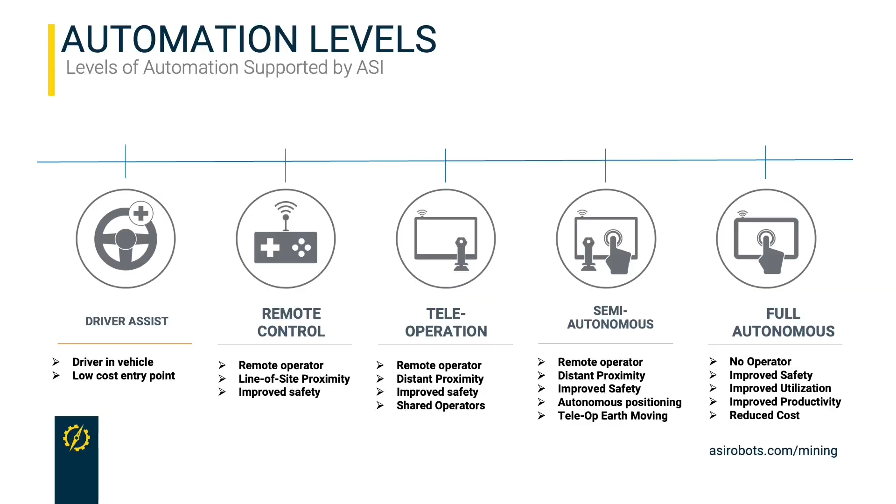Some of the unique differentiators that make ASI as a technology provider different from other applications is really the degree of being OEM agnostic, being able to work with a variety of makes and models of equipment, something very helpful in an application like blasting.

Highly retrofittable, so not only with new machines, but things that can be retrofit to existing machines, even older machines that date back prior to any kind of drive-by-wire capability that have to be retrofit.

Interoperable with legacy systems, like fleet management, is one of those applications where we've integrated with fleet management systems, as opposed to having to require a full change-out of the full technology stack. We try to integrate with legacy systems such as fleet management, and then be interoperable with participating OEMs.

We welcome and encourage participation by OEM partners and allow open access to our protocols to be able to integrate with a third-party OEM to automate that vehicle as a plug-in to our automation solution.

And an agnostic integration platform. So really this platform is all about broad autonomy and the kinds of applications that can plug into it.

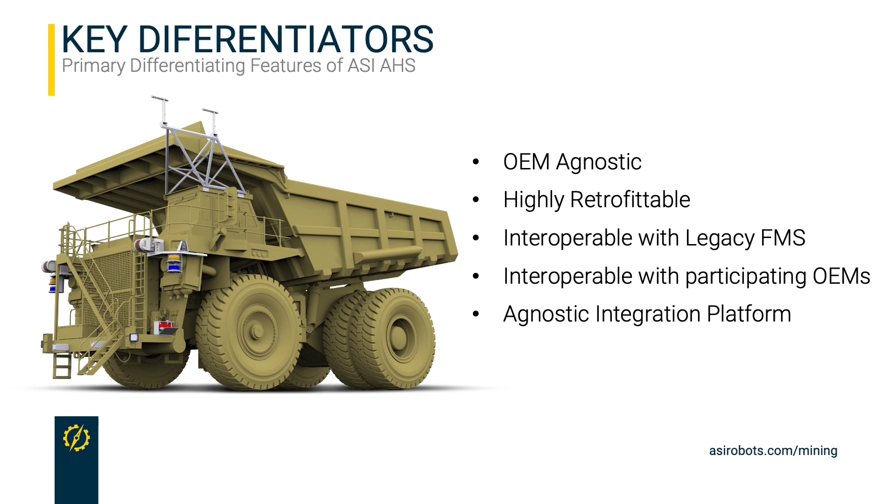As far as the pedigree of ASI Mining is concerned, we started quite a while ago, back in 2006, in the automation space for mining, automating Cat 777s in the Arizona desert, working with articulated dump trucks, dozers, wheel loaders, etc.

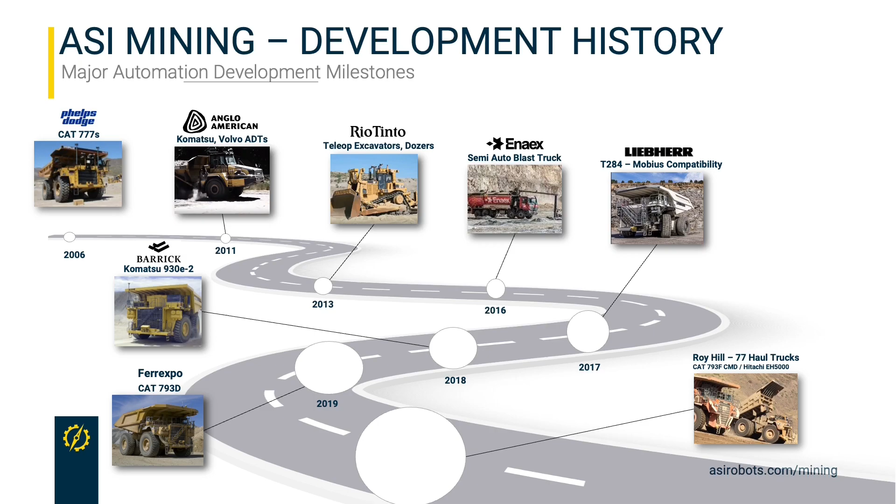In 2016, we started working with Enaex on their semi-autonomous blasting capability, really around ANFO and stemming operations, and being able to position those trucks in a way that Enaex could then leverage them as part of their autonomous blasting solution. We've continued to work with other companies and mining operations.

In 2018, we started working with Barrick on a fleet of Komatsu 930 trucks in the Nevada desert. Currently working with Ferrexpo in the Ukraine on fleet automation of Cat 793Ds, and then Roy Hill in Western Australia, which is a large installation of trucks.

Just to showcase a little bit of some of these beneficial uses of autonomy: really, driving around safety is the first and largest contributor for autonomy.

By removing operators from harm's way, we definitely can increase the safety of mining operations. The nice thing in autonomy has been that there have been no human injuries or fatalities experienced from autonomous operations in the mining industry so far. So we're very pleased about that.

The biggest financial benefit really comes from utilization and availability of a truck, whatever asset is being automated. Typically we see anywhere from 15 to 20% increase in that utilization and availability through autonomy, by eliminating things like shift changes, breaks, and other human-caused delays that are not leading to productive use of the assets. So that's definitely the biggest driver of autonomy.

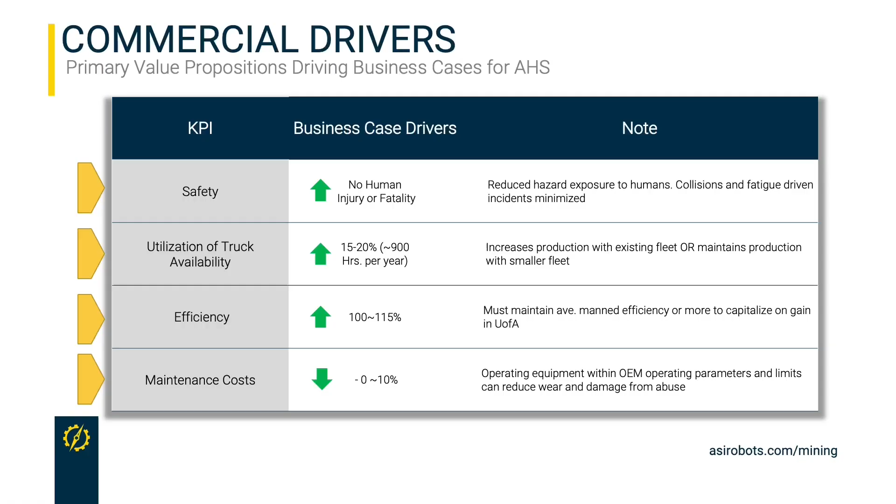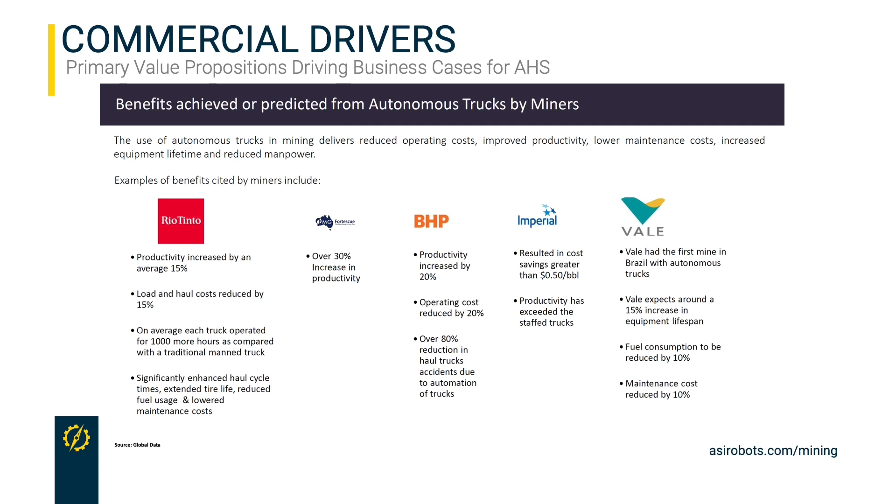You can kind of see in the autonomy world there's been a lot of public statements made by big tier 1 companies that have been users of autonomy for a while. Folks like Rio Tinto have been operating autonomy for several years, stating productivity increases by an average of 15%, load haul cost reduction by 15%. FMG similar, up to 30% increase in productivity. BHP, Imperial, Vale, all making statements in similar fashion of gains in efficiency and productivity ranging up to 20 to 30%, reducing the number of trucks and reducing their fuel and maintenance costs. So it's definitely being more and more widely understood as we continue to see more benefit statements coming out of early adopters.

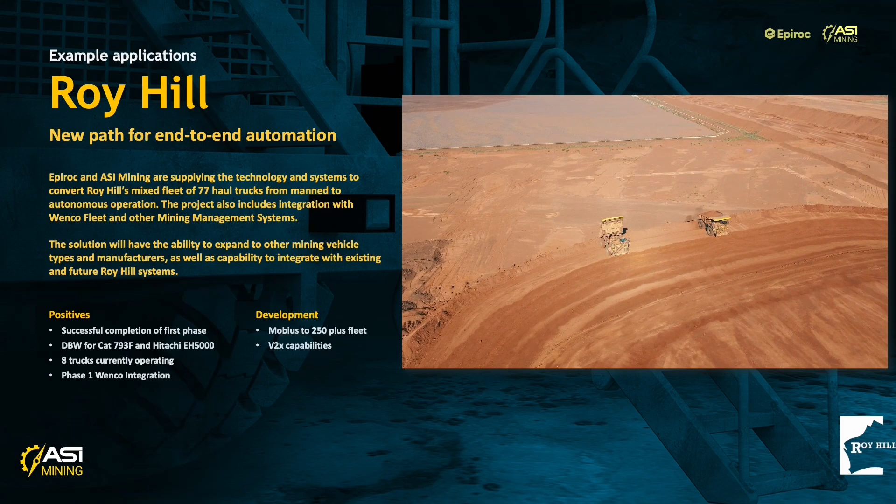So a couple of examples of our OEM agnostic field autonomous solutions that have been fielded. This one, as mentioned earlier, is at Roy Hill. A couple of notable things about this project: it's very large, consisting of 77 total haul trucks of 2 makes and models, Cat 793Fs and Hitachi EH5000 trucks, that all operate under a Wenco fleet management system. These trucks are part of a network of up to 250 total assets that will have either situational awareness in addition to the autonomy that's factored in. We use what's called V2X technology to help supplement communications between vehicles, in addition to vehicles to a central server. It's a very ambitious project, and we're well into phase 2 out of a 3-phase project in Western Australia that's ongoing.

Another example I'd like to talk about is at Ferrexpo. This is in Ukraine. It's an iron ore mine that is leveraging autonomous technology to convert a fleet of Cat 793Ds. Currently operating 6 autonomous trucks, and will expand up to 15 trucks in the 2nd phase of this project. One interesting thing about this project - it's one of the first, and maybe only, instance where we're actually loading autonomous haul trucks from a drag line. This also features an integration with the Wenco fleet management system, and again is an exciting first entry of autonomy in the CIS in Ukraine.

So interoperability - something we talk a lot about - we want to spend a little time talking about what that really means. A great way to illustrate that is through this architectural drawing of our particular autonomy stack. Starting at the top with the fleet management system, and again, as mentioned before, it can really be any third-party fleet management system provider. We hope to be able to integrate with a legacy fleet management system, such that the mine operator can keep the investment they've made in fleet management in place as they contemplate adding autonomy.

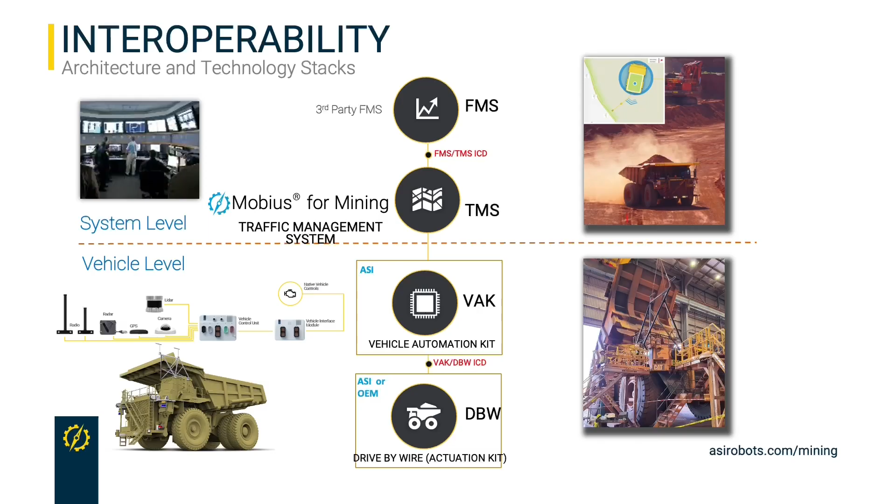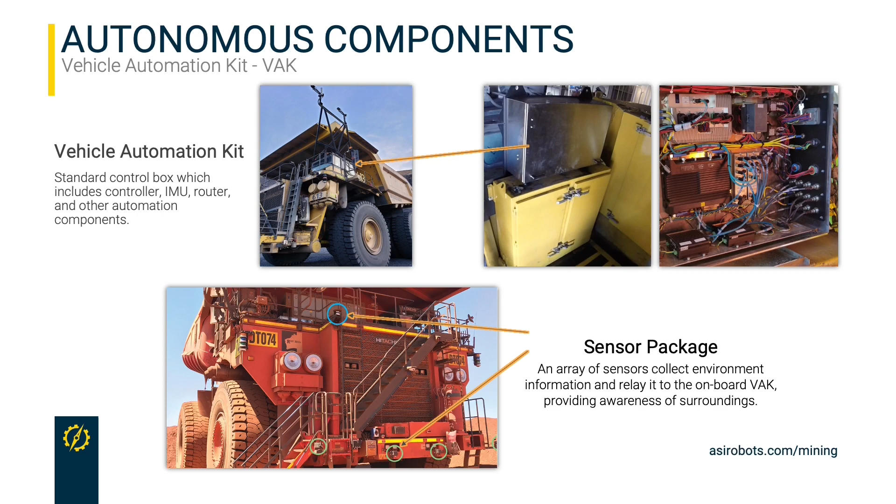This is a brief slide showing the position of the sensors and the vehicle automation kit, typically placed on a haul truck, where you see forward-facing LiDAR and radar units that are part of our vehicle automation kit, with the box integrated into the truck in convenient locations. Again, this is a standard component that goes on any vehicle we automate, and it interfaces with a drive-by-wire.

Liebherr is one example where we've actually been able to integrate with a third-party OEM to bring their system into our Mobius solution. We announced this several years ago, and Liebherr continues to be an example of an OEM that can interface with an agnostic system like ASI.

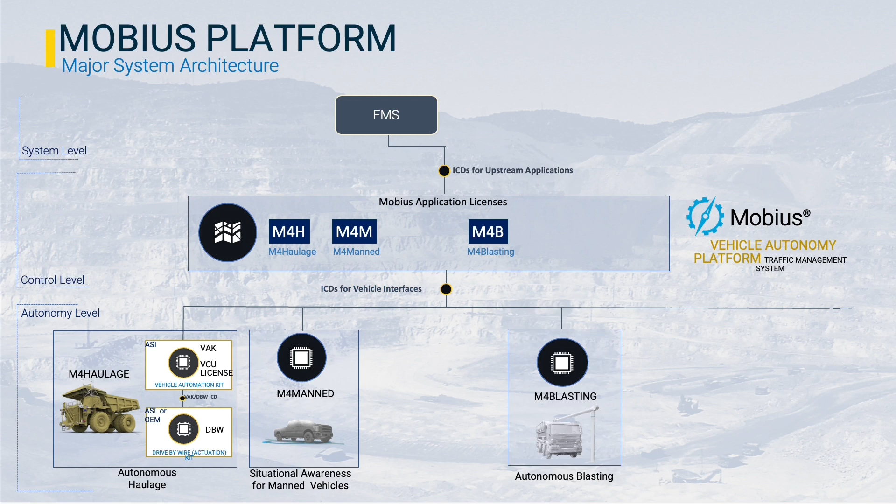Want to talk about scalability and integration. We talked a lot about haulage today, and if you look at an architectural depiction of that solution, this is one way to visualize it.

At the system level, having a fleet management system that sits at the top provides dispatch information to a traffic management level, which is at the control or command level. In our case, that's called Mobius, with Mobius having application licenses that look at things like haulage, manned applications for manned vehicles that would work in an autonomous haulage application.

And then at the actual vehicle level, the VAK, the Vehicle Automation Kit, and a drive-by-wire solution, along with situational awareness devices for manned vehicles. So this would be the depiction of a haulage, an autonomous haulage application.

If we look at how we'd scale a solution like this and bring in something like blasting, the Enaex program that Enaex is working on, the blasting program becomes an extension of this autonomy platform by plugging in a Mobius for blasting application license, and then at the vehicle level having the onboard hardware vehicle automation kit that plugs into our autonomy platform. So this is a natural way to extend that autonomy platform and scale it across these applications.

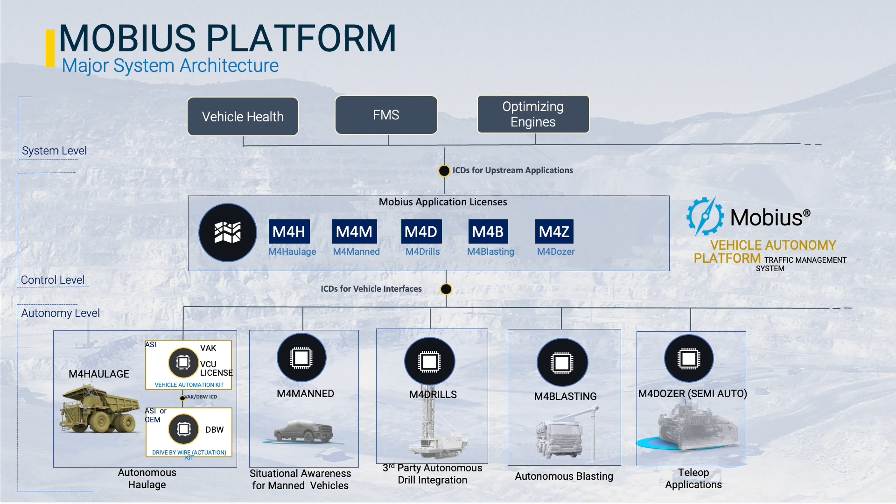But we can go further with this, all the way through things like third-party autonomous drill integration, which was recently announced with Epiroc at the show, and then teleop applications, things like dozers, wheel loaders, or other applications. All of that can be integrated into this common autonomy platform so that these autonomous solutions work together in an integrated fashion as opposed to having to maintain pure isolation from each other.

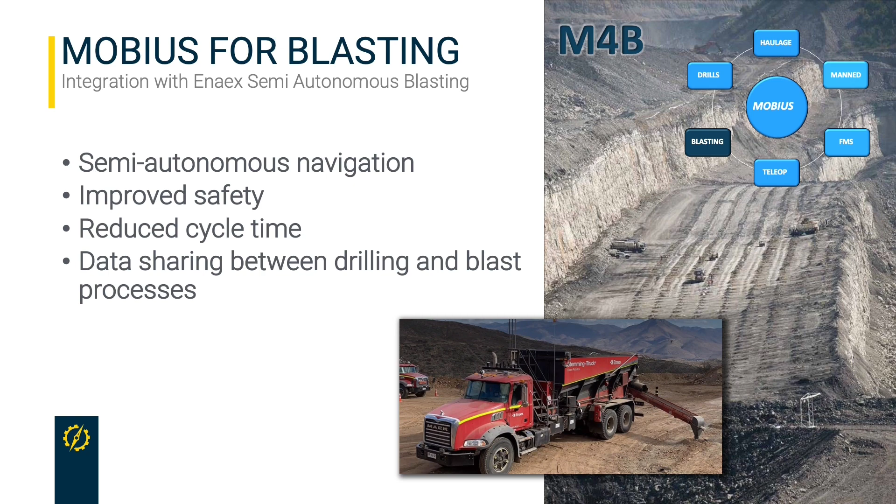Covering the blasting solution in particular, we're very excited to have been partnering with Enaex for several years to provide semi-autonomous navigation of ANFO and stemming trucks in this autonomous platform. What that's done is improve safety. We can look at things like reduced cycle time, and also opportunities to provide data sharing between applications like the drill and the blasting process. So these are all things on the horizon for our blasting program with Enaex.

Here's a brief video I'd like to show you.

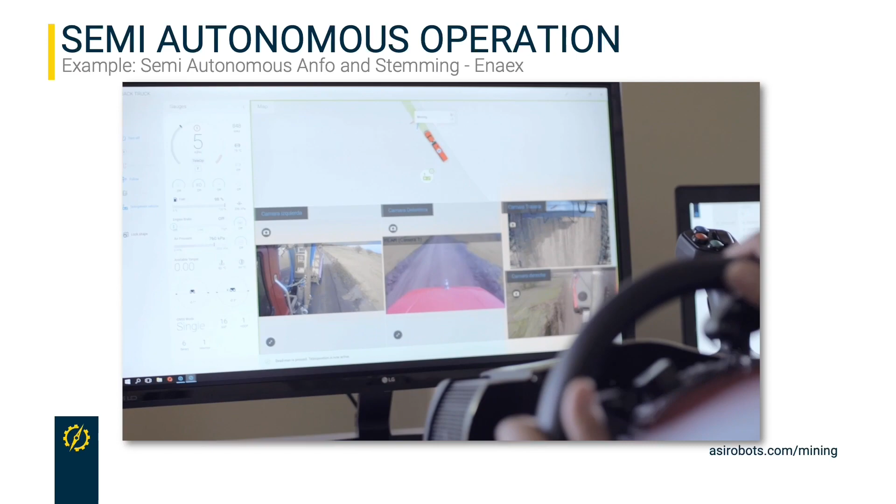That video shows off some of the capabilities we've been able to work with Enaex on to establish that semi-autonomous capability, which really provides a lot of improvement in terms of the ability to mine in hazardous situations and leads to other benefits for our customers moving forward.

What is the future of autonomy in mining? In the case of ASI and our autonomy partners like Enaex, we're looking to continuously improve the value proposition for our customers by enhancing the KPI performance of these autonomous systems.

It's not enough to just have the machines operate in these spaces. We really need to look at unlocking value and finding ways to increase performance, to unlock more opportunities for savings in both things like utilization benefits, efficiencies, along with safety and the other drivers of benefits in autonomy.

Furthermore, we're continuing to expand the autonomous applications that cover a larger portion of the mining ecosystem, providing capabilities across different vehicles and application types, and continuing to flesh out the building of whole scalable autonomous mining capabilities.

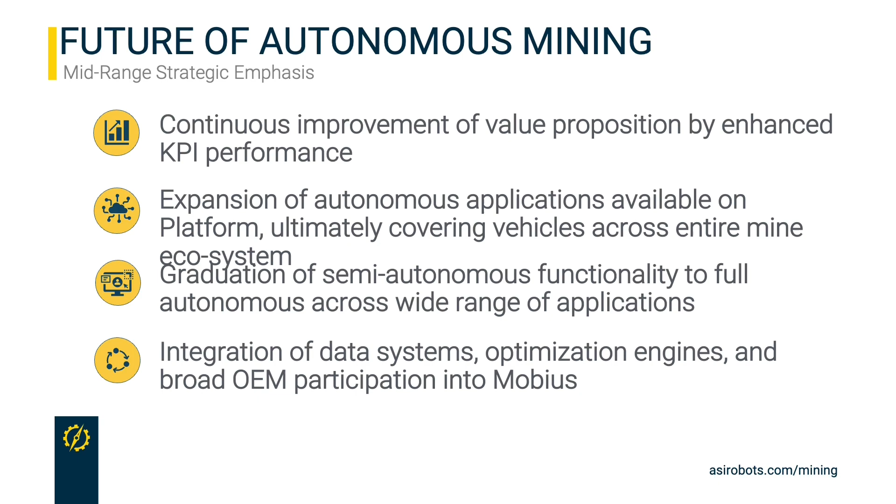And then finally, it's the ability and interest of integrating data between systems to really optimize operations from an autonomous standpoint, fueled by data that's been optimized and guiding the autonomous systems to greater efficiency and capabilities.

This leads up to this vision of a fully integrated autonomous mining operation where we're covering the full ecosystem of mining, where all of these applications, whether fully autonomous or semi-autonomous, are integrated, sharing a common operating zone and negating the need for isolation between these applications.

This is the big opportunity for an integrated platform like the Mobius platform from ASI. With that, it's always a pleasure to be part of an exciting opportunity with partners like Enaex that are doing incredible things in this space of autonomous mining. Thank you so much for your time today.